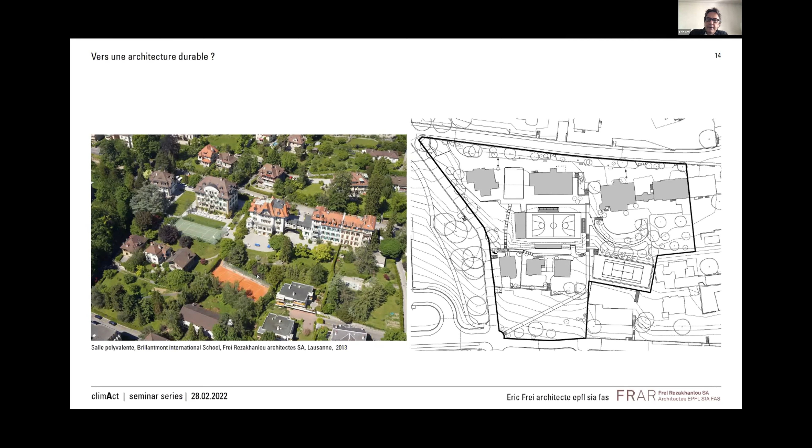So I will try to stay in the timing. Eventually, I will renounce some part of the presentation.

I mean, the fundamental aspect I would like to bring to the discussion is the need to experiment about the ecological and social transition. So the need to consider that every single transformation we are today working on, designing, should be conceived as a true laboratory. At different scales, at the big scale of the Great Geneva that I'm going to illustrate a little bit, but also at smaller scales.

The title I put to introduce the Great Geneva work is towards a new biopolitical project, because we are clearly rediscussing values. We are really rediscussing relations between life, space, and power. So I think that the transition is not just a technological transformation, but is really touching on all these different levels.

So we developed this vision for the Great Geneva together with the Habitat Research Center, and we considered that there were two fundamental entrances to discuss the transition of this metropolitan area. They were soil and the transformation of work, transformation of labor.

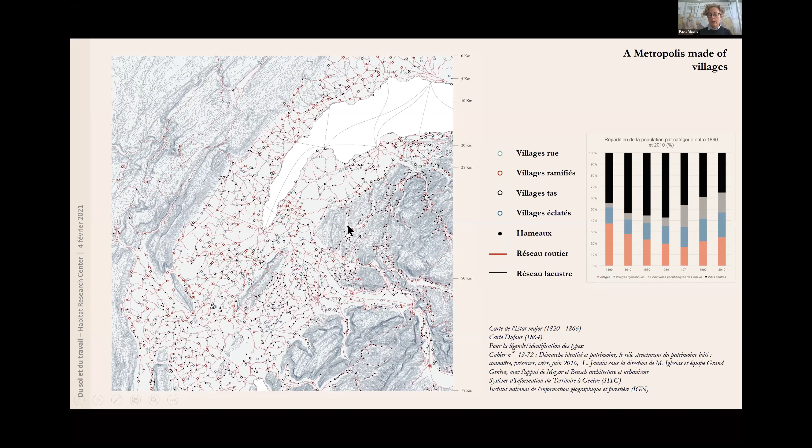But we know that planning until today has practically only worked on the more compact part, or the part that is easily connected through public transport. In fact, the territory is different. The population is distributed in a different way, and we still miss an idea about this type of metropolitan condition. So, as I said, we propose to work on several scenarios oriented towards the soil question and the transformation of work.

I would like to spend a few words on the soil scenarios, which have as a background the objective to go towards an urbanism of the living soil, where soil is not just inert matter but is living, and to go much further than the current policies on, well, the law about productive, fertile soils. In the case of the Canton of Geneva, this is the number of hectares that are protected today. But this number of hectares is really not adequate for a territory that wants, for example, to feed itself.

So the first scenario is soils for climate, and here we are mainly looking at mitigation strategies. As you probably know, soils contribute significantly to reducing CO2 emissions, and this is true of Great Geneva soils, French and Swiss soils, and of course we can imagine participating in raising the carbon stock in Great Geneva soils by 4 per 1,000. The different types of land use can contribute in different ways, but it is important to understand that urban soil can also contribute, not only the rest.

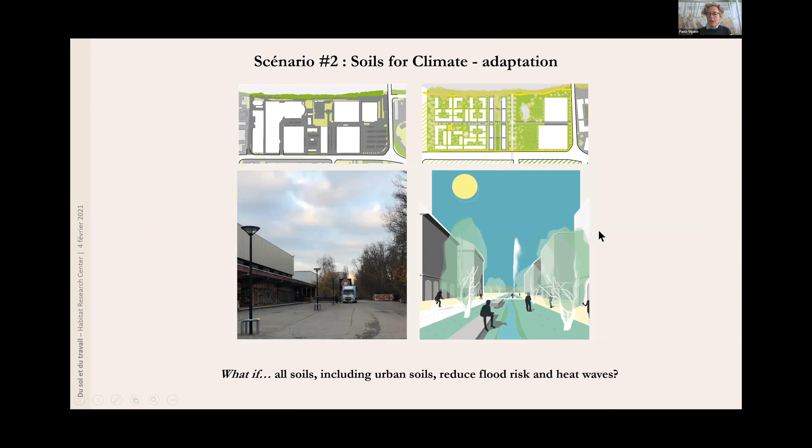For, say, the possibility, the capacity of soil to reduce flood risk, to reduce heat waves, and also to regenerate and to have a better biodiversity in the city. I was saying just a moment ago that urban soils are not a marginal surface. That's something we discovered that was a surprise even for the pedologists that were working with us.

We were working with the HEPIA in Geneva. And what we discovered was, in fact, that the urban soils, excluding roads and excluding buildings, were practically of the same dimension, same proportion as the agricultural soil, and more than the natural, let's say, soil. So this was really a big surprise, but it's clarifying that this is data at the scale of the Canton of Geneva.

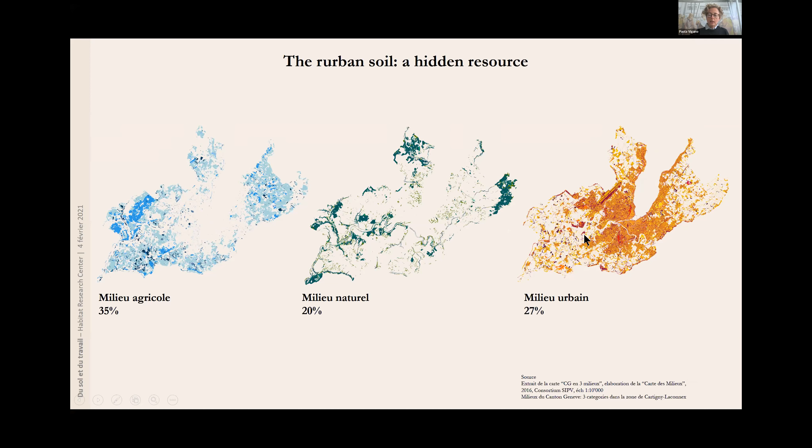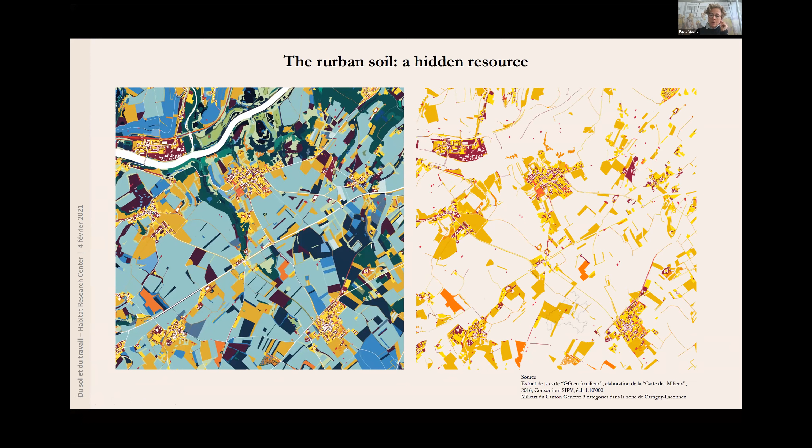We did not have the possibility to check with good information on the French side, but in the Canton of Geneva, which you know is a very dense canton, we are really at the same level between urban soils and agricultural soils, which means that there is a lot that we can imagine doing in the case of urban soils. Urban soils can be very different things, can be parking lots, can be also open air sport facilities, can be a lot of different types of soils, but nevertheless there is a potential that I think we have revealed with these maps that is much higher than what was imagined, even by the specialists of soils.

And this brings us also to the third scenario, that is about food self-sufficiency in Great Geneva. And the investigations we made are bringing us to the fact that if we consider working on the existing agricultural soils, on the gardens of all the pavillonnaires in Geneva, on the transformation of a part of the urban soils in general, we can go close to a self-sustaining metropolitan area, maybe not really getting to 100%, but getting much closer than we are today. And of course, we have to imagine that our diet will be adapted and will reduce a certain amount of meat consumption.

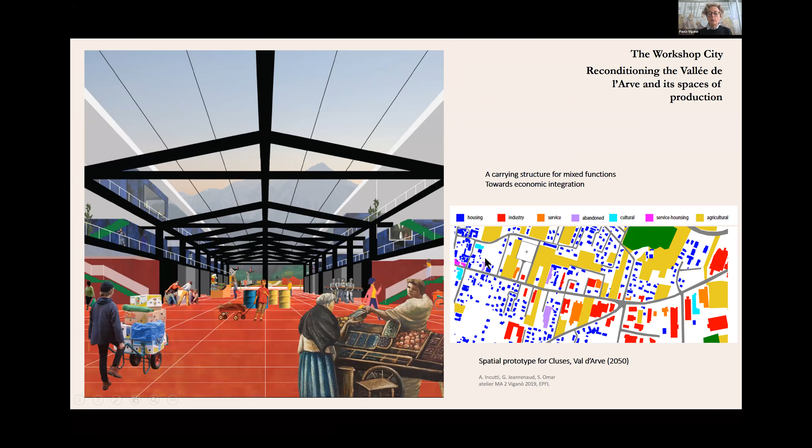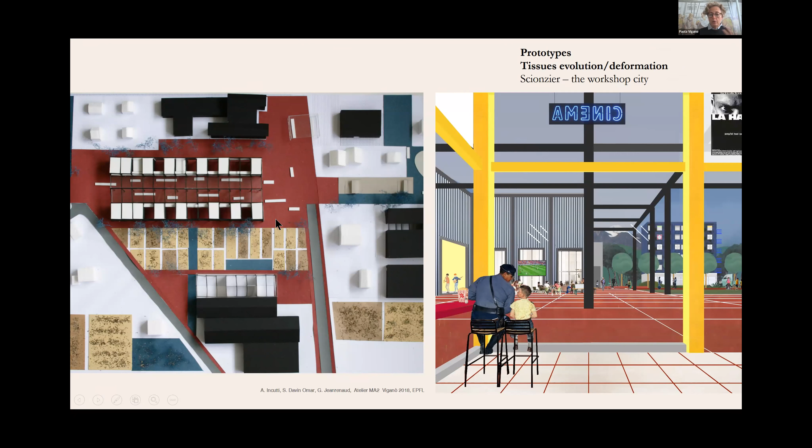And we were imagining a kind of workshop territory, workshop city, where the reuse of objects, the regeneration of objects, can be organized. And then this is an intervention at the urban scale, where you work on the existing buildings and you imagine maintaining a certain mixed use, so maintaining also forms of production, but at the same time you reorganize also small agriculture or housing or services.

Our first, let's say, prototype is the idea that we can restructure the Great Geneva through a different type of structure that is not only the big and hard mobility-related structure, the transport infrastructure, but also considering other aspects that can play today a fundamental role in reorganizing the metropolitan space. I'm speaking of the space of water, I'm speaking of the forest, I'm speaking of agriculture, I'm speaking of slow mobility, I'm speaking also of social services that can altogether be the beginning of a different structure for this metropolitan system. We need a structure in this metropolitan system, but it cannot be just related to transport.

And by doing several hypotheses, we arrived to say that to realize this weak structure for the transition that is offering a series of also ecosystem services that are fundamental to go through this ecological and social transition, you might need a certain percentage of the surfaces, let's say 38%. This 38 is just a number to start a discussion, of course.

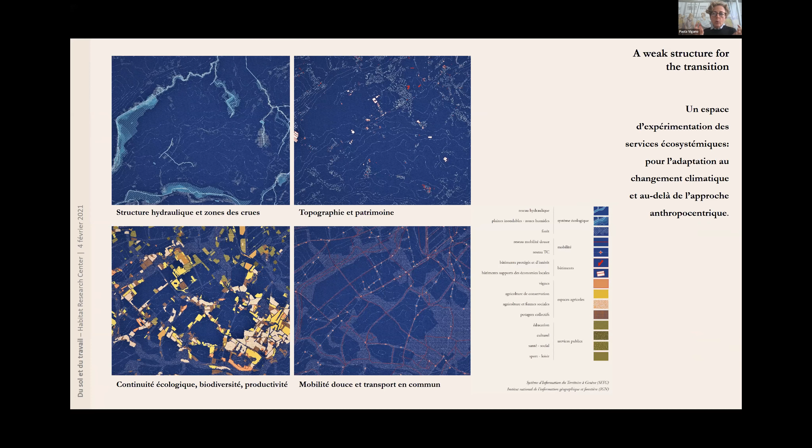More than half of this is already woods and forest. The 9% is already wetlands or flood areas. The 11% is urban, and the 25% is already agriculture. So it's not something that is completely transforming, completely denying, let's say, the existing territory, but something that wants to make out of this a system, although maybe a weaker system that can reorganize

the metropolis. Just to give you some image, we started, of course, from the Braillard plan for Geneva that was proposing these public surfaces that were around 40% of the canton, even more than 40%. And Braillard was, of course, influenced by the characteristics of the landscapes, of the villages, of the type of jobs, of the culture, let's say, of inhabiting a territory. These are very important photographs made by the Boissonnas brothers at the end of the 19th century.

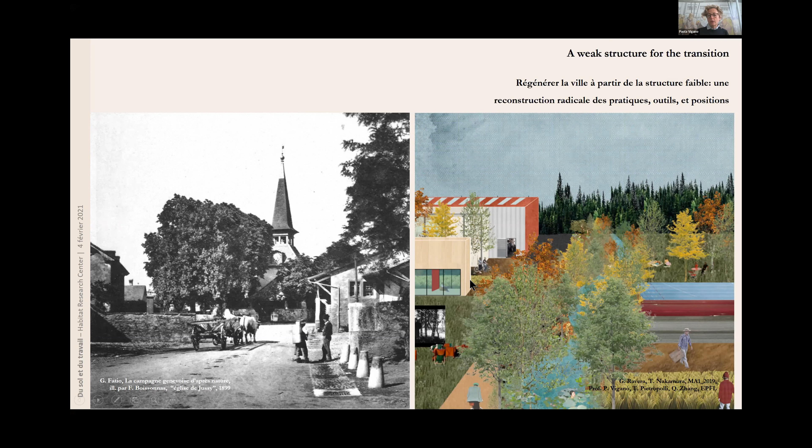And we can imagine to rethink with the same idea of really bringing together ecology, transport, jobs, and also culture, heritage, all together, and to redefine a structure for the Great Geneva. This could be, for example, one output, which is not denying the importance of the hard transportation infrastructure. Here you see the proposals we made was first to reopen a series of railways

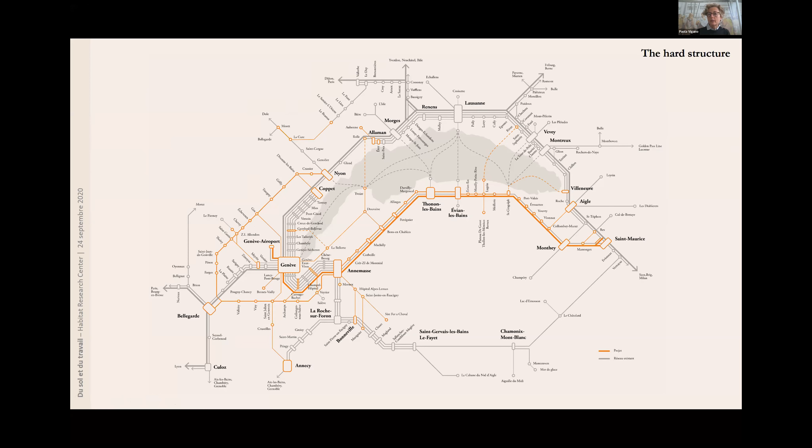that have been closed and partially also transformed in the last decades, but also to revise the idea of several metro lines, because at the beginning of the 20th century, Geneva and the canton of Geneva had much longer lines of tramways that have been dismantled and that probably we would need to reintroduce. And we got to this idea of eco-socio-spatial prototypes. That, for me, is a fundamental aspect.

More and more we understand that when we speak of ecosystem services, we are not only speaking of services given to us, but they are services that the ecosystem is giving to itself for its resiliency. And we added the spatial aspect, because all this is in the territorial space. And the weak structure is our first and most important prototype. It is a prototype that can be conceived as a big common, because it is for the general interest.

Okay, I can stop here. Maybe if I have only 2-3 minutes, just to clarify what was the second part that I will not develop. It was to show how at a different scale, at the scale of one city, in fact one center of one city, this idea of laboratories of the transition could be also developed in the idea of a visionary pragmatism.

Of course, we need to transform, to change, to adapt, to mitigate, but in cities, and cities are fundamental for this transition to happen. So we have to go through at the same time a kind of pragmatic attitude. We work with politicians, we work with people that are city services, but also we have to be visionary, because otherwise we will remain in the actual situation.

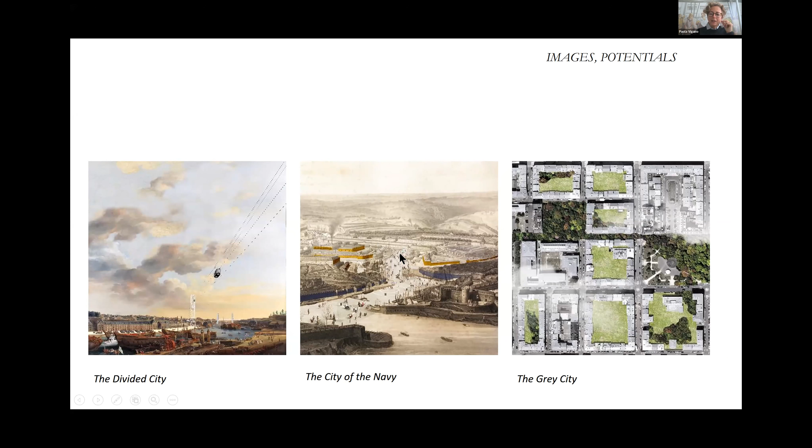And this is why we worked also on the level of the imaginary, because the perception and the images we have of our city, of the place in which we live, can evolve or accept to be transformed if we can really understand the core of collective imagery about that site. So I have not the time to illustrate that, but this is all the work we did also with the citizens in order to understand which were the images that could more easily and frankly speak of a possible

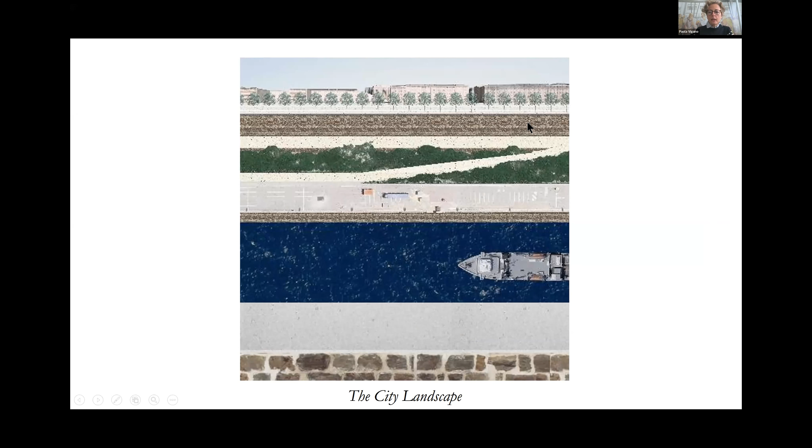transformation. Okay, maybe I can stop here and just say that we proposed strategic spaces for the transformation, but also and fundamentally a diffuse project of inhabitability. So the theme of inhabitability, I think, is at the core of the preoccupations about the climate transition.